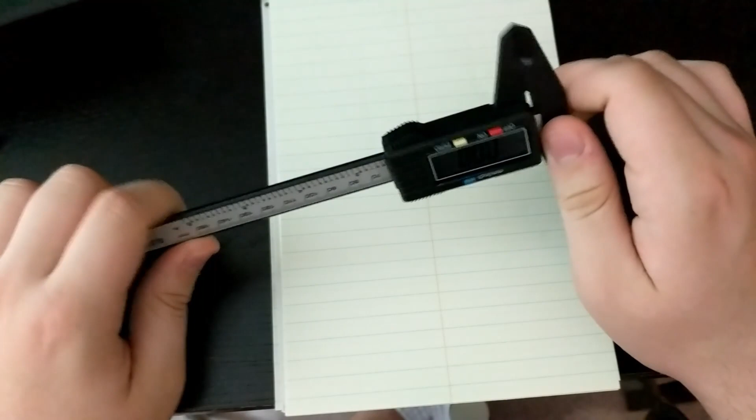I actually just recently picked up a caliper too. I recommend having a caliper if you're going to do this. It's not super important to have—you could easily use a ruler—but it's going to be really nice to have, especially in the future.

So what I like to do is start on paper, and I usually draw side views. I'm going to probably draw a view from this side and maybe a front view, because I'm not entirely sure how I'm going to shape that yet. I might not do that, but I might do it as I'm working on the model.

So what you're going to want to do, in my case, is I already measured the shower, and now I'm going to measure the speaker. So turn on your caliper—most of the time it'll turn on automatically. Make sure your caliper is zeroed, and make sure it's millimeters.

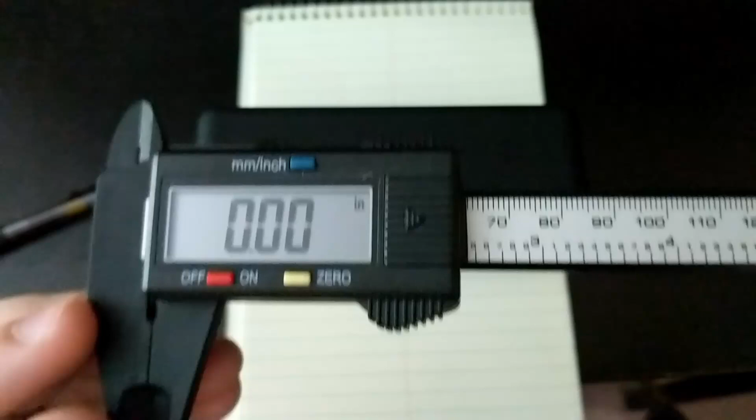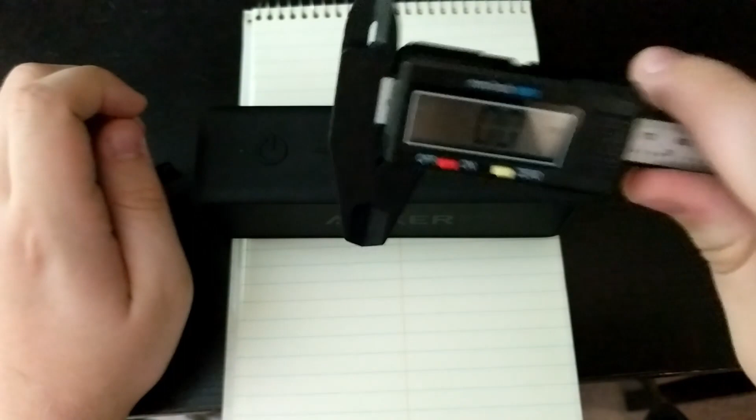Why would it be in inches there? So it's in millimeters—make sure you have it in millimeters. That's going to make your life a lot easier, especially if you have to convert from millimeters to centimeters or centimeters to meters. It'll make it a lot easier because the metric system makes sense. The imperial system does not.

So what you're going to want to do is open this up to slightly bigger than the thing you're going to be measuring, and then take a measurement.

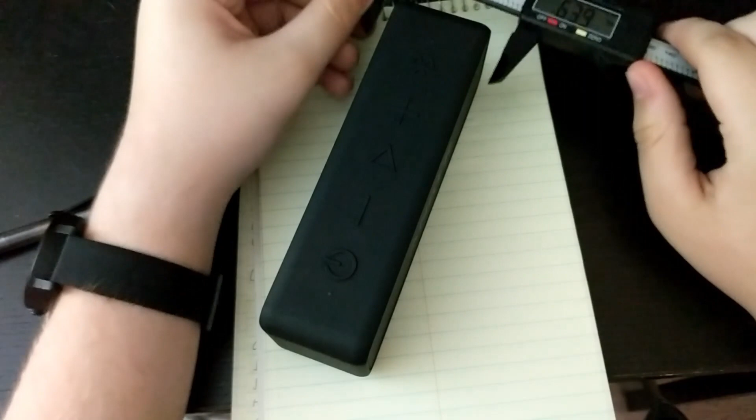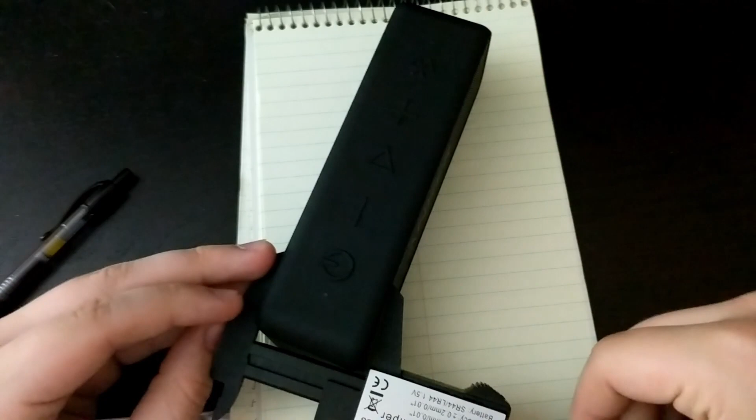So it says it's 46.8 here, wide, and I'm probably going to round it up to 47. And over here it is about 47, so I might do 47.5 just to leave a bit of tolerance for shrinkage of the model. I'm not super confident in that—about 47. It did move when I slid it off, so yeah.

And then let's see how long this will need to be. This might not be long enough. No, okay, so it's not long enough, but I'm honestly not too concerned about that, because I'm probably going to have it stick up in the middle here. There's like a bass reflector here, and I've covered that up before, and it doesn't affect the sound as much as if I cover up the speakers. So yeah, I'm going to do that.

So now that we've got our measurements here—47.5 wide, and the shower was 60 millimeters—I'm going to draw a basic sort of design here. It's not going to be super advanced. This would be a lot easier if I had graph paper, but I personally do not currently.

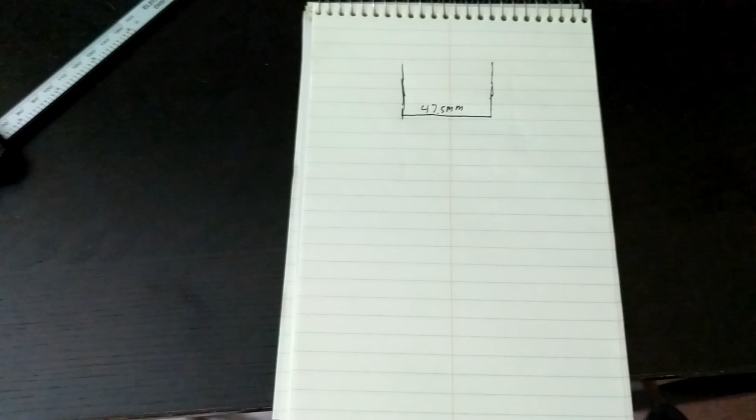I went a bit too far there. I'm going to draw a little line going across here, and this is going to be—how wide was it again? 47.5 millimeters. I've written millimeters just for this video. Normally I use millimeters as my default unit, or centimeters, but I will 90% of the time use millimeters, and yeah, for the sake of the video I've written that down.

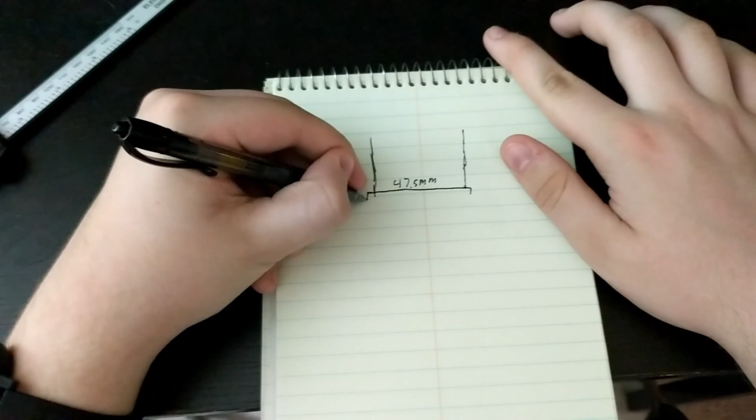And then for the bottom we're going to get a little wider. There we go. And then we're going to have it—actually, how tall is the speaker? Because we want it to go slightly higher than the speaker. So if you measure the height, same thing.

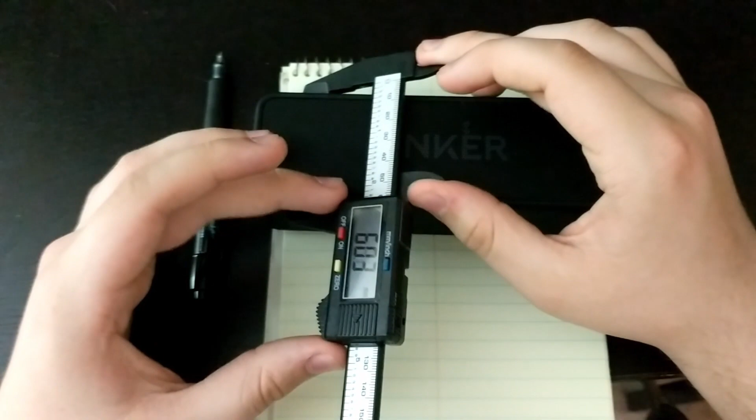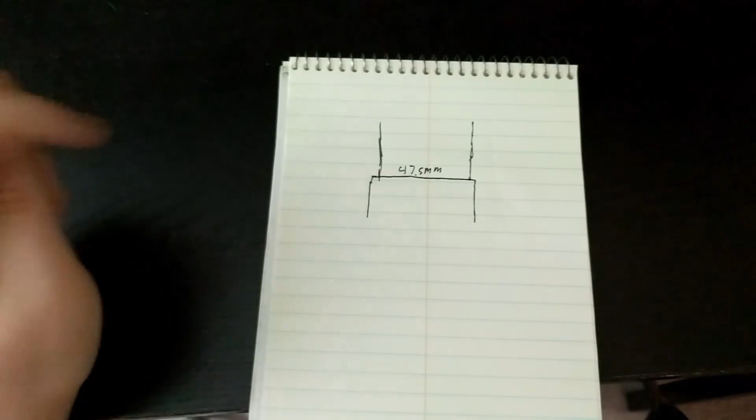Right, okay, height. That is 56.7, so I'll probably round up to 57.5 millimeters.

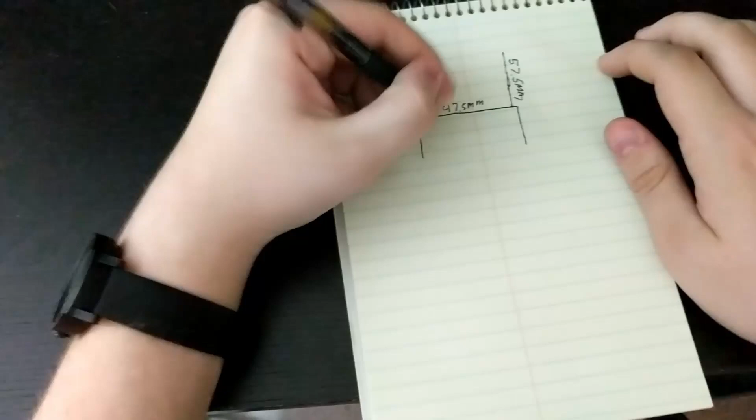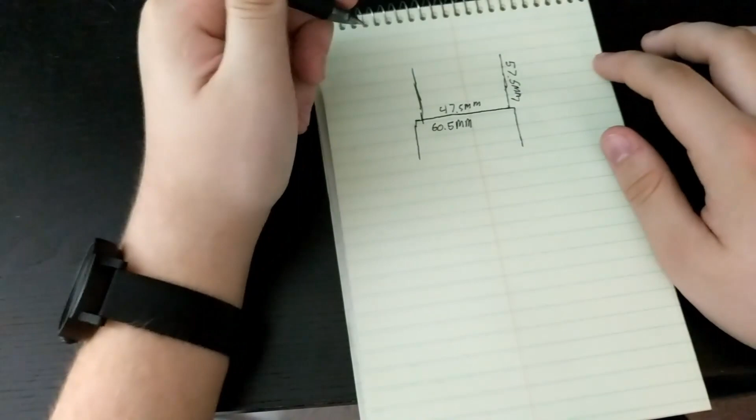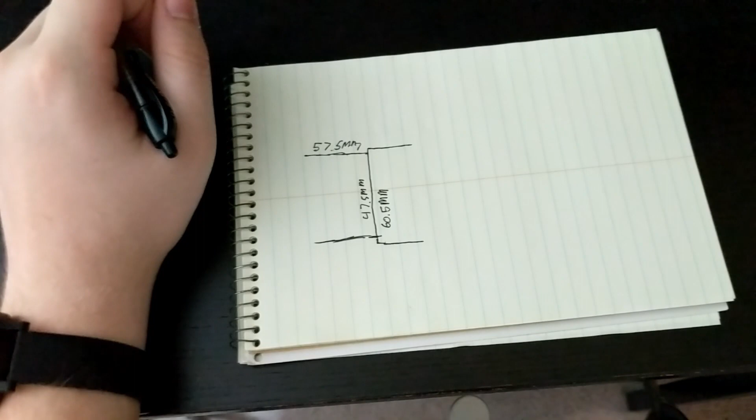And then down here we're going to want it to be 60.5 millimeters, because it was like 60.3. It's a weird width, but whatever. And then this is going to be, I don't know, it doesn't really matter the width of this, or the length of this part here, but let's make it 40 millimeters.

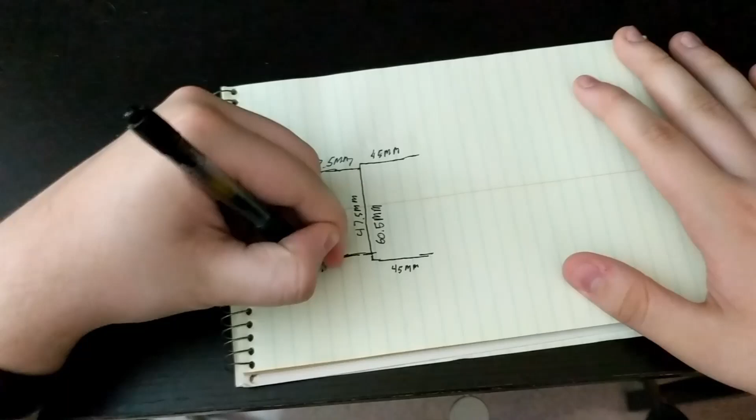No, sorry, 45 millimeters. I'll just write them over here too. Excuse my handwriting, I'm really bad. Oops, 45 millimeters. So that's the side view here.

And then what we're going to do is we're going to extrude it. Let's see, oops, hit my microphone.

I should probably be recording with that right now, but we're using my phone microphone. So I need a flashlight, do I have one of those? I do, interesting. I will 3D print this on Thursday or Friday, that's when my 3D printer is coming. Yeah, I don't have one yet.

Ooh, come on, there we go. So you can kind of see in there, so about the edge of the logo, so from edge to edge.

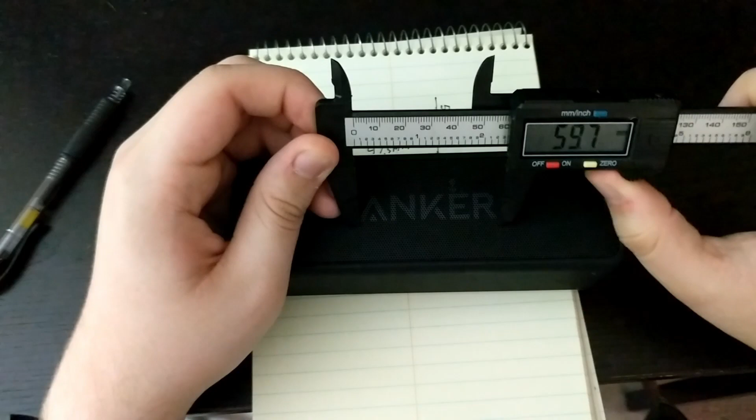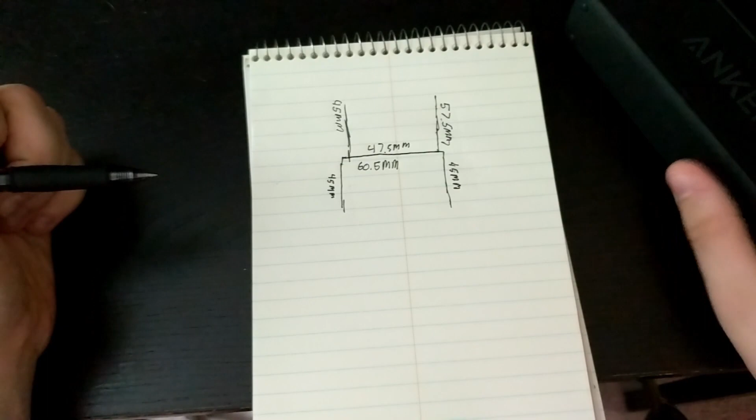Oops, so I'm gonna do the widest bits, because that's nearly exactly 60 millimeters. I'm not too concerned about the width of that, but yeah. Okay, yeah, then we're gonna extend it out 60 millimeters.

So let's start drawing a front view. Actually, that's 60 millimeters, and then we're gonna have this thing come down and be 1 centimeter wide, 10 millimeters.

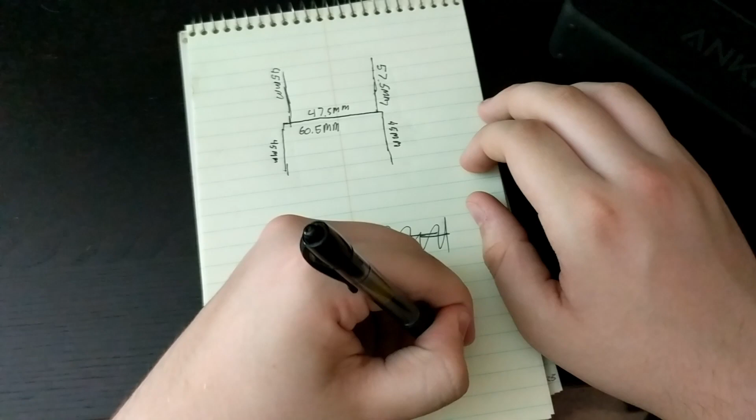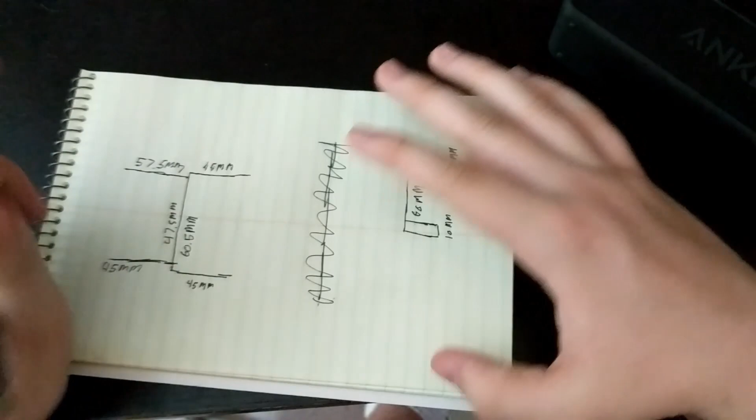Same over here, 10 millimeters. And then, as per this here, it is 45 millimeters, so we also want this to be 45 millimeters.

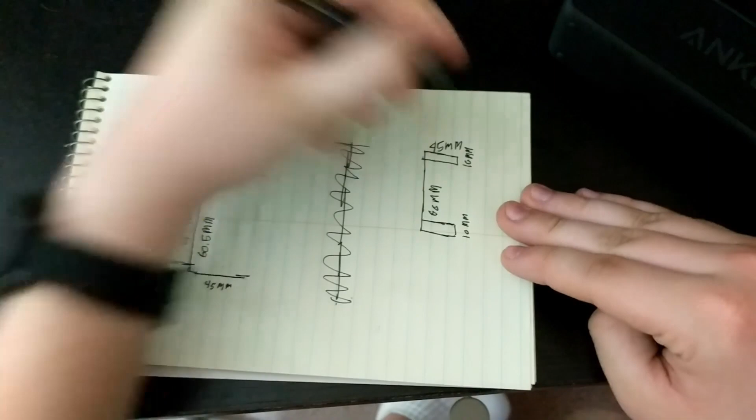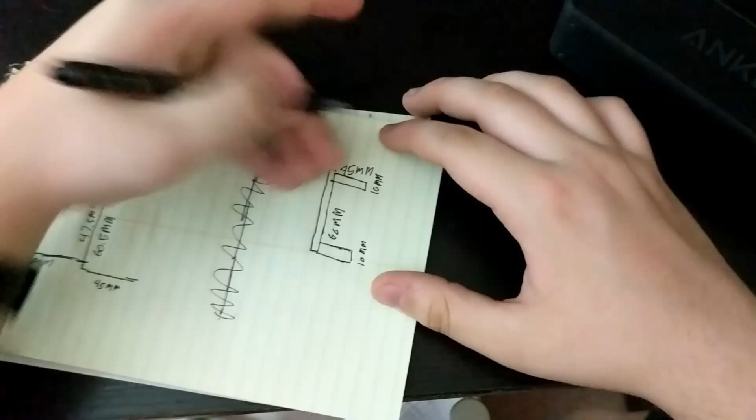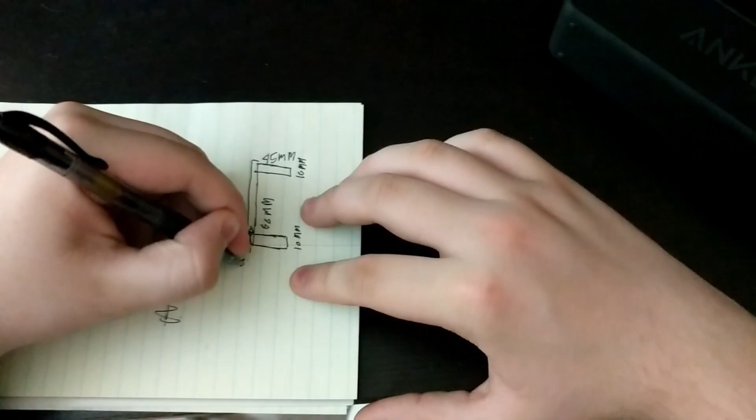And yeah, and then the top, let's make this center bit half a millimeter, or half a centimeter. Just kind of make it clear there. 5 millimeters, that's a really bad thing.

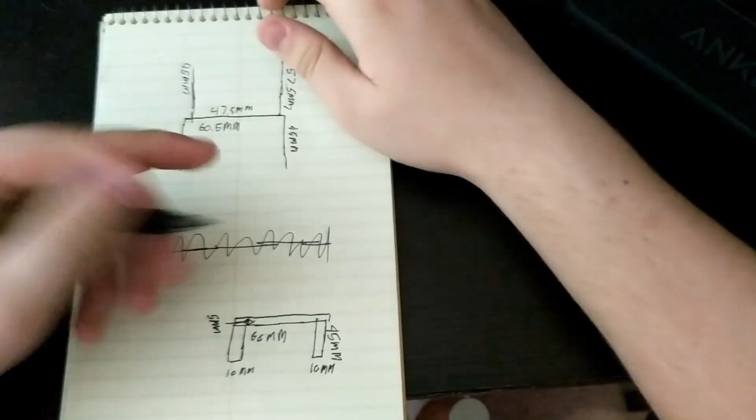Okay, and then up here we're gonna have it, okay, so let's put it about there, maybe. Yeah. This isn't gonna be dimensionally accurate.

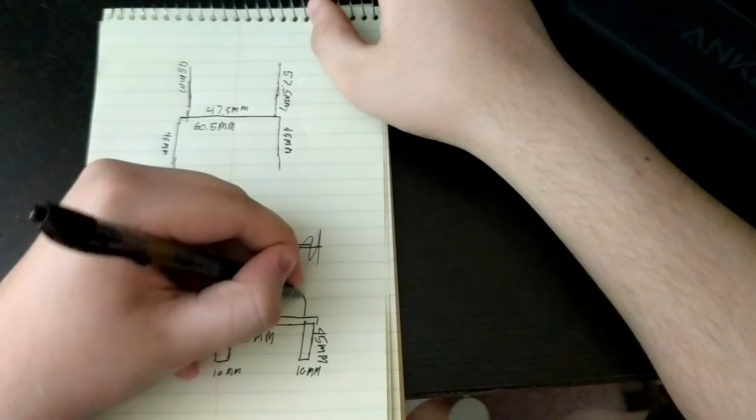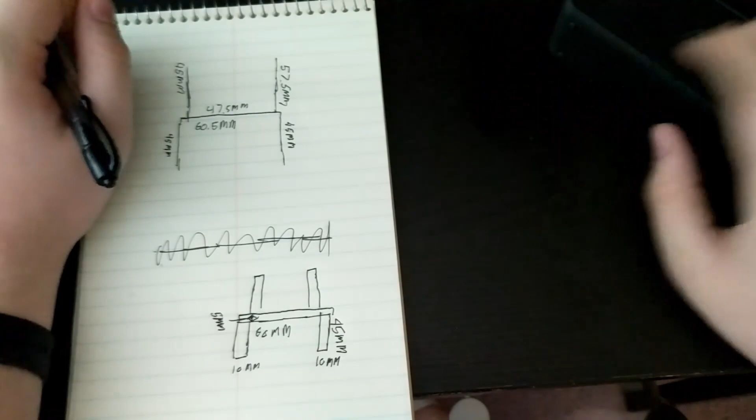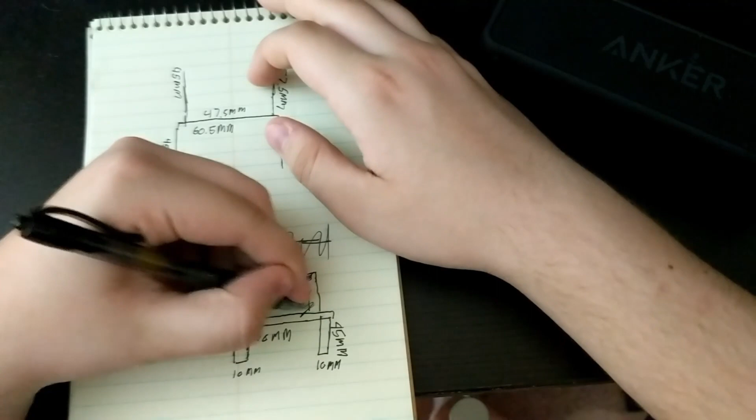So then you can see here that this is 47.5. Oh wait, 60. Oh, crap. Okay, just ignore that bit, ignore. 60, there.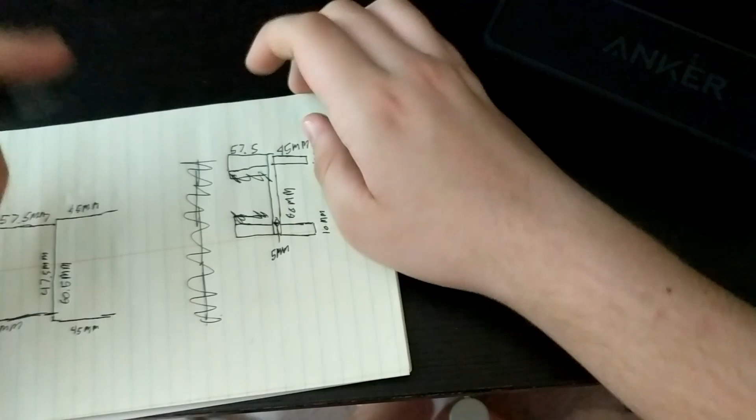So then that can be 57.5, and then those will also be 1 centimeter long. So it's not perfect, but it will get the job done.

So now let's head over to Onshape. Okay, so now that we're in Onshape, I have this tutorial series folder, but we're not going to use that because I'm actually using this for my own personal needs, but I'm just making it in a YouTube video. So I'm going to call this speaker holder.

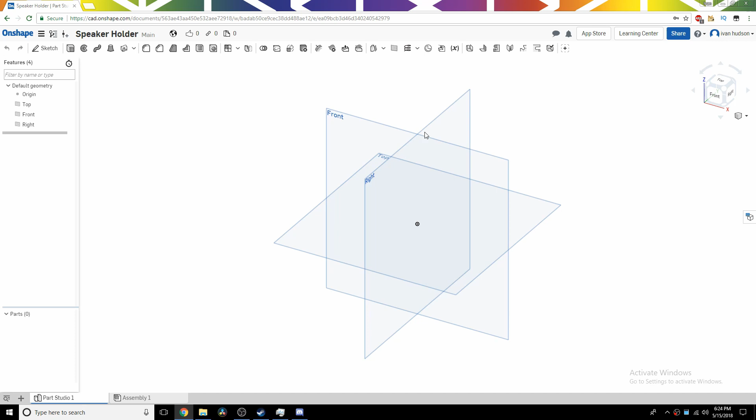And once we're opened up into the document, we're going to do a side view, I'm going to start with the right side. Okay, so you'll see here we've got this, and we're going to want to start a sketch, same thing as yesterday, it's not very complicated.

And now I'm going to reference my drawing. So I probably should have added a bit of width to the thing on there, but I'm probably just going to do that. I don't think this is actually set to units, I think this is set to centimeters. Yeah, millimeters. Let's do kilogram too while we're at it, oh grams, sorry, okay.

Let's make these 5 millimeters thick. So, oops, let's use the sketch. Okay, oops, Steam is telling me stuff that I don't really care about. Okay.

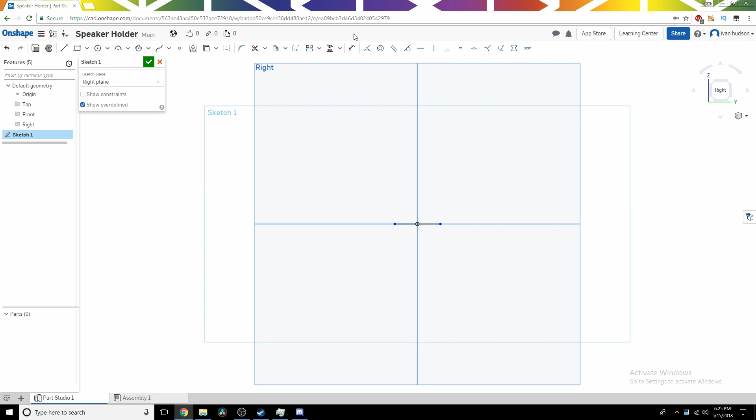We can actually center this. Also, I'm not sure if I did this yesterday, but it's really bad practice to have undefined lines. So what we're going to do, how wide does this need to be? It's widest, so 65 or 60.5. And what you can do in Onshape actually is 60.5 divided by 2, and what that'll do is that'll divide it by 2.

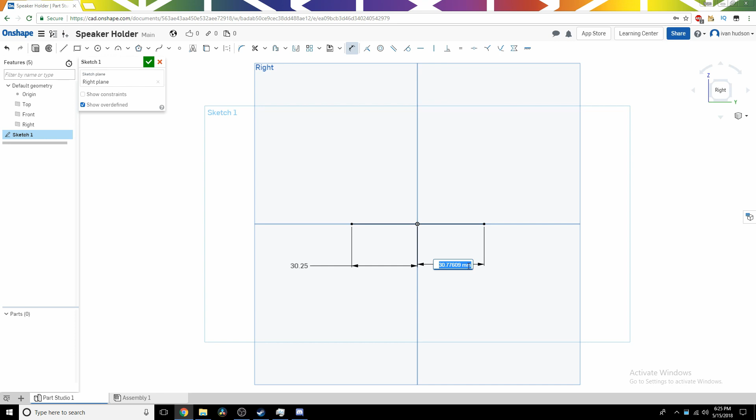And then on this side we are also going to make sure it's the same size, 30.25. So yeah, that's the widest point. And now what we're going to do is we're going to have this come down and be 5 millimeters.

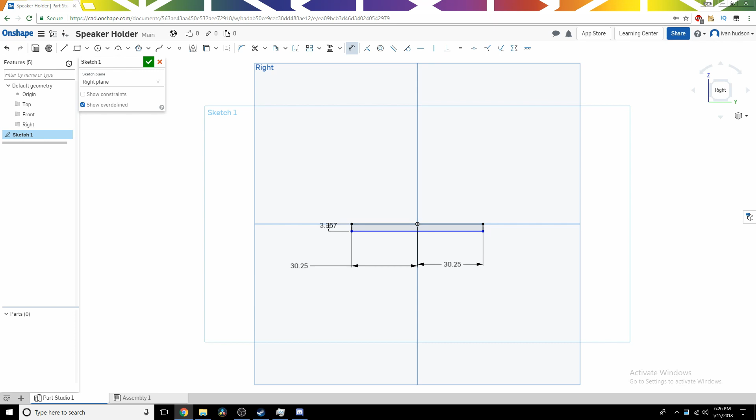Okay, so we want to make sure that all of these lines are defined, because it's just good practice to get into. So how much is 5 millimeters? Let me visualize this on my caliper. 5 millimeters is quite... it's actually not too bad.

Okay, let's do 4. There. Whoops. Oh, okay, it's not gonna like that because we, yeah, here. So, it's D, and then make sure that's still at 4. Okay, so that's all good.

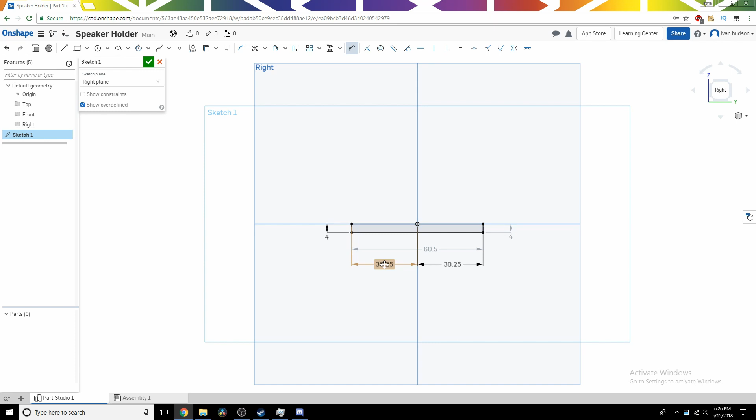Now this bottom line should be a total of 60.5. I just like having that there. Also, if you're doing this in college, I've heard that they will fail you for having undefined lines, so make sure all of your lines are black if you're using Onshape. But then again, I'm not in college, so yeah.

I actually might have to make this one here a bit longer. Okay, so that's good. And then down here we're going to make this. Okay, so how wide is that? So let's add 2 centimeters to each of these.

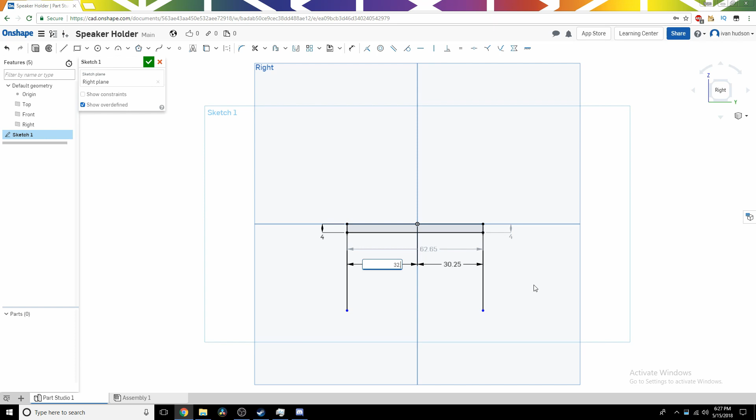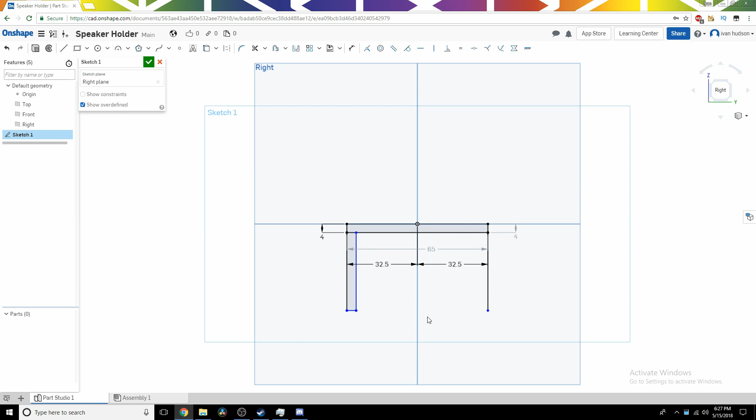32.5. Nope. 0.5, and then same thing over here, 32.5, because then that'll give us an equal width on each of these. Then we're just going to make these 2 centimeters, or 2 millimeters, sorry. I'm in the habit of saying centimeters for everything, so that's usually, sometimes, not always. I will on rare occasions.

Ooh, actually no, let's do 34. So we want these to be the same width, just because it'll look good. 34. Okay, so now you'll see those are blue, that means they're undefined. So we're gonna make these 4 width-wise, 4. And then from here to here needs to be 60.5.

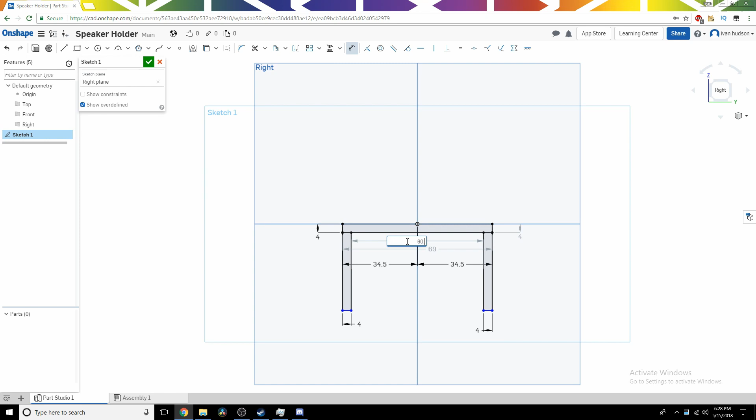Oops, what is it breaking? View. Ooh, actually this doesn't matter too much, it's fine-ish. That's defined, it should be defined. Why aren't you defining those lines? You're annoying me, damn it.

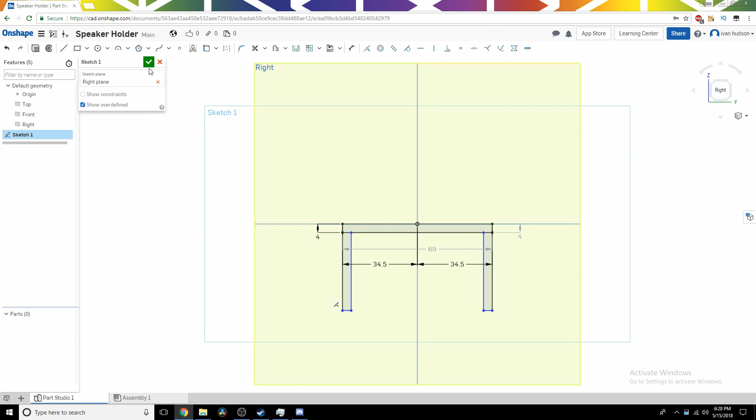Okay, you need to be defined. That's the one I'm trying. I know that's the one it's doing, but I like it being the black one. Fine, just be that way. Okay, whatever, that's bugging me that this one's going black and that one isn't.

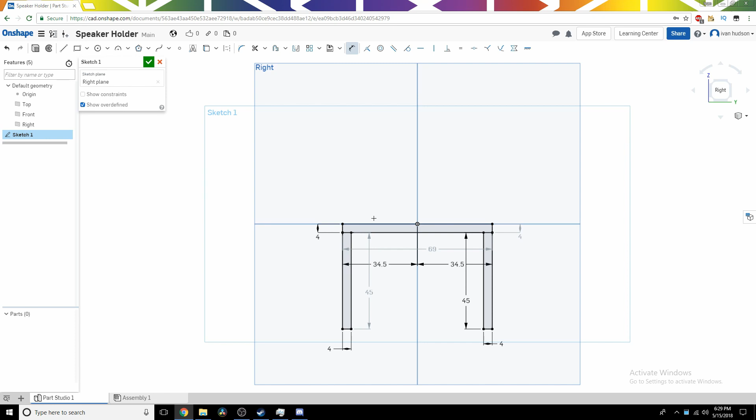This one needs to be 45 millimeters. 45. This one should also be 45. Good. And now up to here. So that needs to be at its center point.

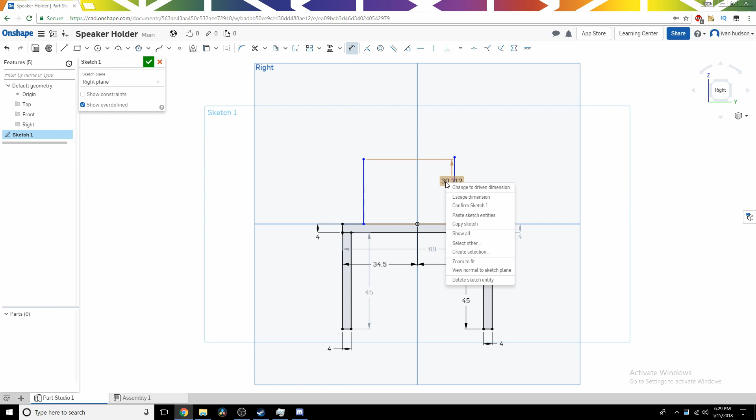Get another line. Okay, so, nope, we need the distance tool. These need to be, oops. No, I suppose we're gonna have to, let's keep that one. That needs to be, oh, I messed up on that. Whoops, 57.5.

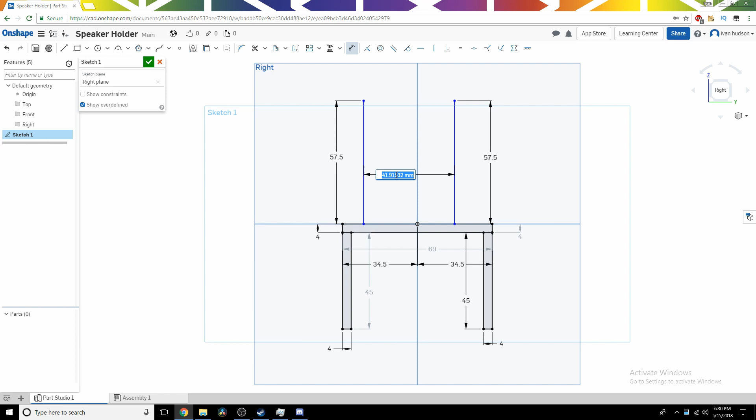Oh, 57, oops, good, 57.5. Where I messed up was I wrote 45 on this side of the drawing, whatever. And then here needs to be 47.5. Oops, 0.5. So now those should be good.

And along with this, we're going to make a line once again. Okay, so then these ones also need to be 4 millimeters by 4 millimeters. Perfect. And now we're just going to want to center these, so it's a total length of 69 millimeters.

So what we'll do is 69 divided by 2, that is 30, I don't know. Hey Google, what's 69 divided by 2? 30. The answer is 34.5. Okay, close enough, so 34.5. So on each side of these, they should be 34.5.

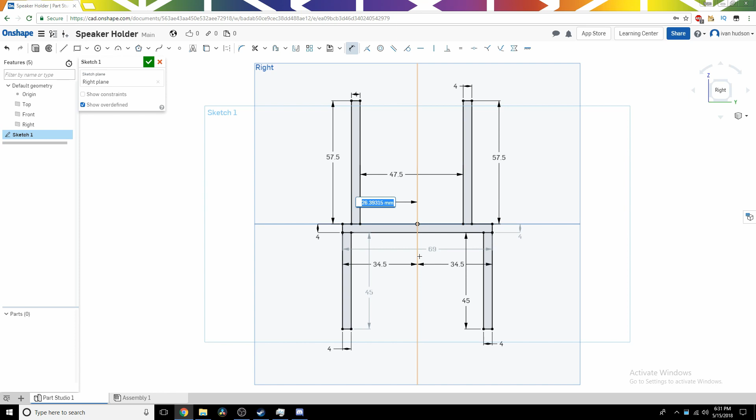Oh, okay, that's a rookie mistake. Okay. I probably should have thought that through a bit better on my drawing. Who cares? Yeah, okay, how are we gonna do this?

Actually, no, here, let's just fetch a calculator. Give me a minute. Go down. Okay, so let's do 69 minus 47.5. Oops, what is this thing's problem? I hope it was taking input. Oh, what the heck? Interesting, okay.

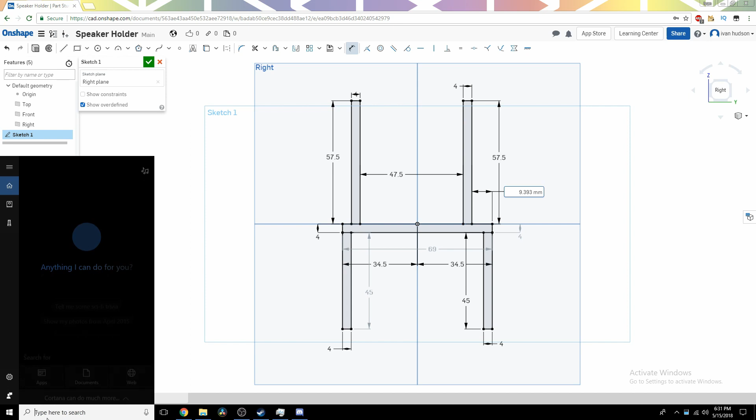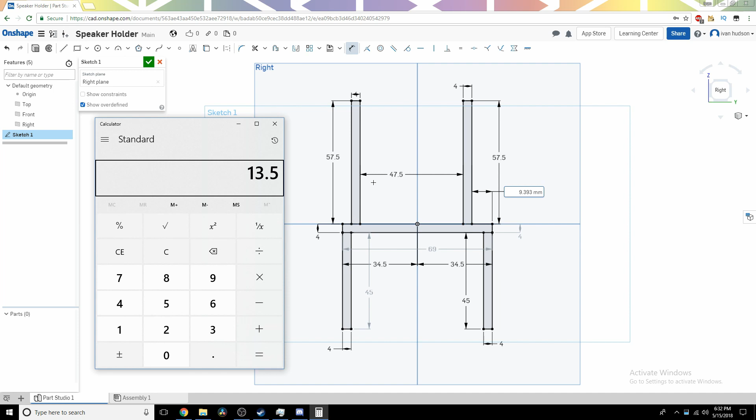69 divided by, or nope, not divided by, minus 47.5 minus 8 because of the width of these, so 13.5 should be the leftover space, right? Wait, yeah, so 13 and a half, divide that by 2, and you get 6.75. Then you do 6.75. Let's delete this one, I guess.

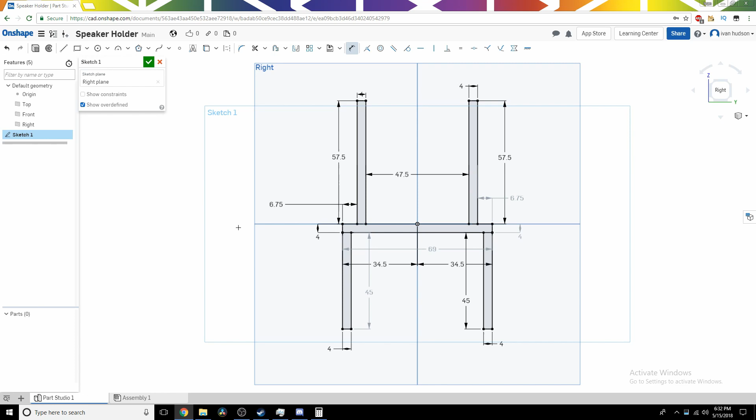And if we've done this right, it should be 6.75. Perfect! Okay, so now we've got the side view drawn, and you'll see it's still just a 2D drawing. And that's fine. So while we're at it, let's make sure none of them are overdefined, which is good. It's a good practice to get into. Yeah, so now we're going to extrude each of these. How far?

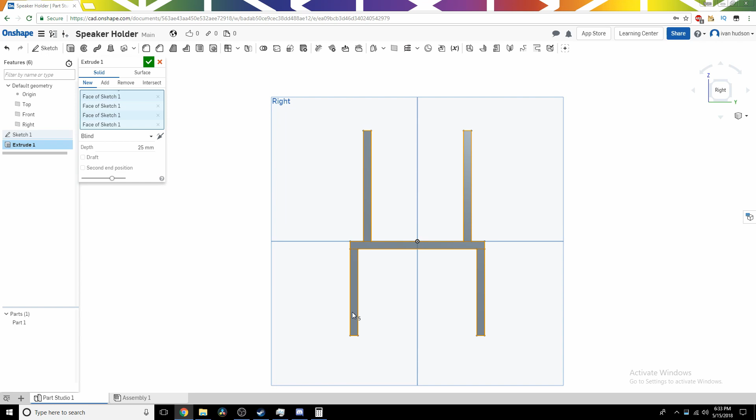And then we've got this. You might notice this is going to completely cover up the bass reflector. The way we're going to fix this is, okay, just double checking, we're going to create a sketch on that plane. And then what I am going to do is something a little like this.

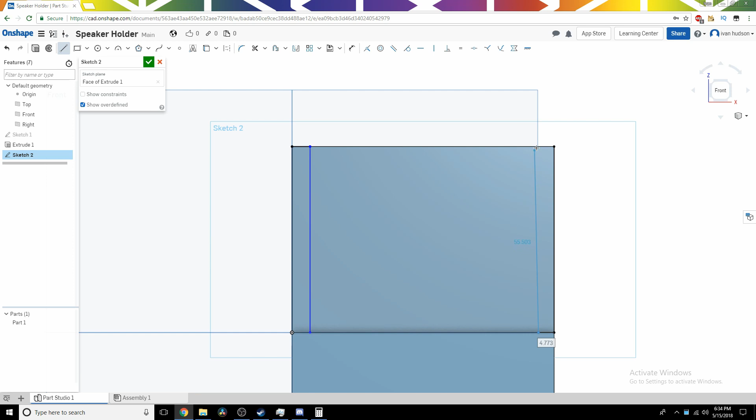Now I need to add a line on the bottom of this one. Perfect, that's very good. No it isn't. Oh yeah, it is. Okay.

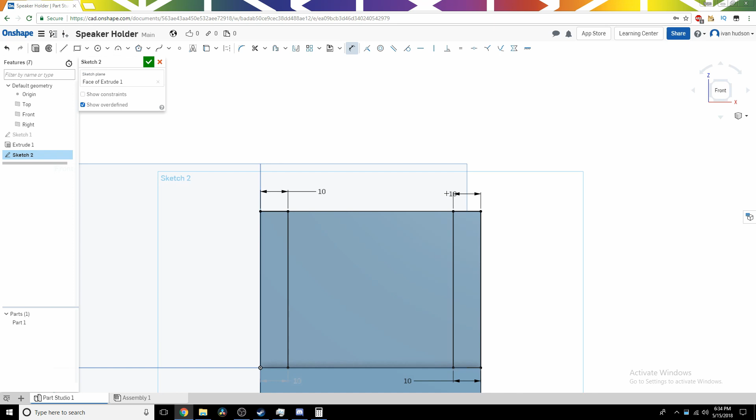Since I marked these down as being 1 centimeter, let's do that now. I'm just going to keep that there because I like knowing that. I know it's 10 centimeters, or 10 millimeters, but either way, I like having that reassurance.

That's all good. So what we need to do is we actually need to make this inner bit a closed-off shape, because that's how this works for whatever reason. Don't ask me why. Then we're going to choose the inner shape and make sure it's set to remove.

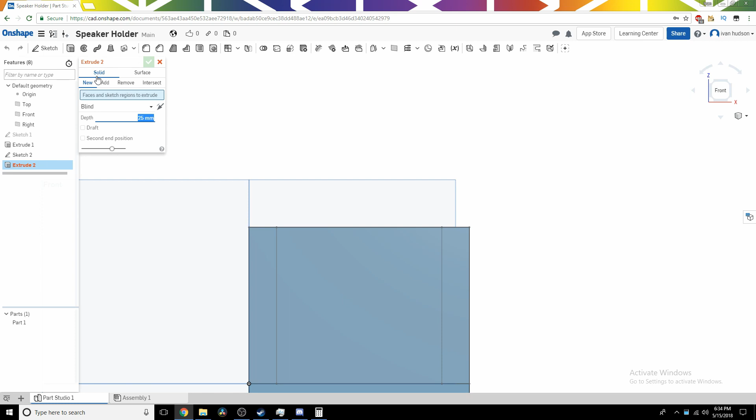And then, how wide is this? 69, right? Nope. Okay, whatever, it's good enough. So now you can see we've got the speaker holder.

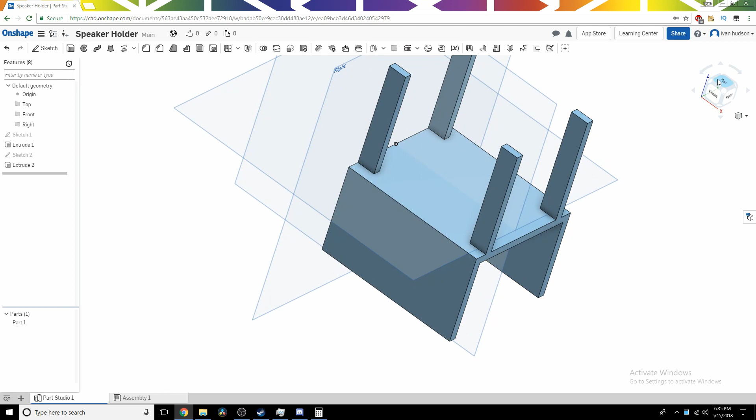What we could do on the bottom is we could actually make that a bit better, but we don't really need to, because it's already doing just fine the way it is. It will save plastic though, so let's actually do that anyway.

So let's go back into this. No, we're going to have to create another sketch. Okay, so we're going to have to create a sketch down here because I didn't think to make a plane. So we're just going to have to do this again. It's not going to be too hard.

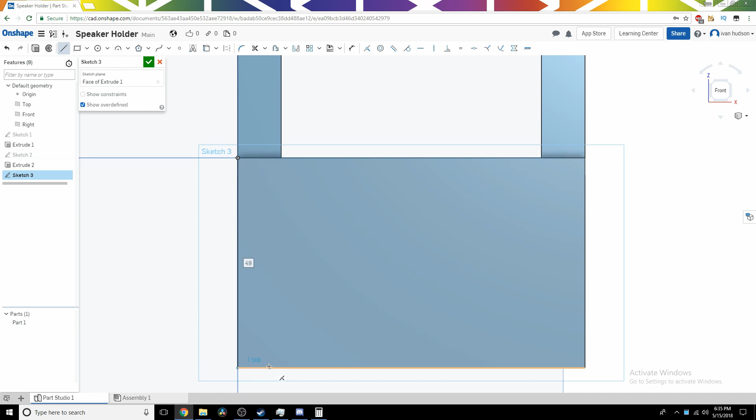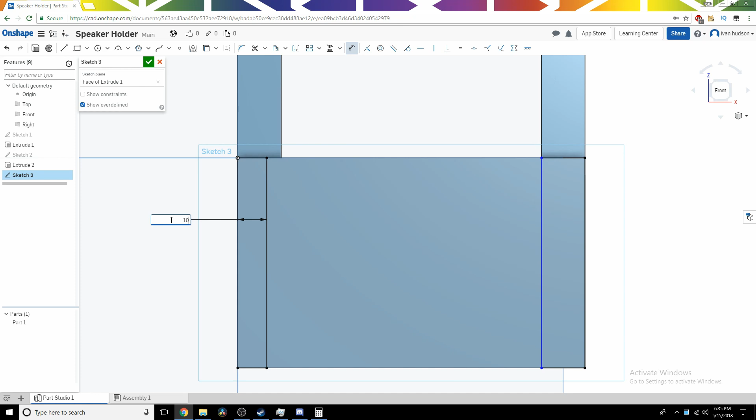Okay, then get the line tool once again. Oops, L, there we go. It doesn't have to be perfect, remember we're using the dimension tool. Then press D, pop open your dimension tool, make this 10, assuming you're in millimeters. In my case 10, because I highly doubt you have the same exact shower as me. Shower sliding door, I don't even know what it's called.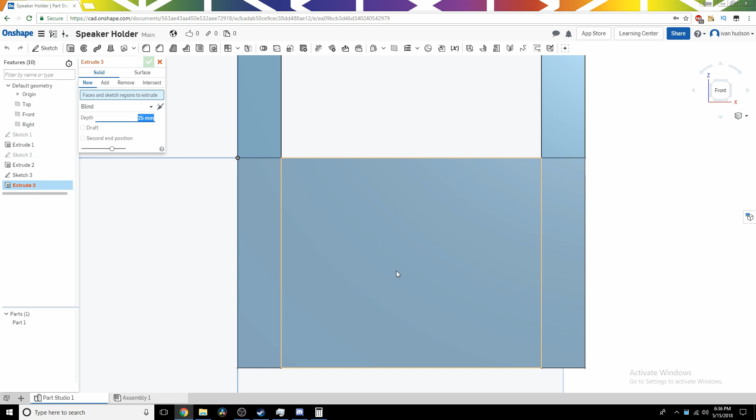Okay, perfect. And then, once again, we need to close this off. Perfect, perfect, and perfect. Okay, now this one should be the right amount to remove, so that should get us straight through. Perfect. Okay, so that's going to be very cheap, plastic-wise, and a problem.

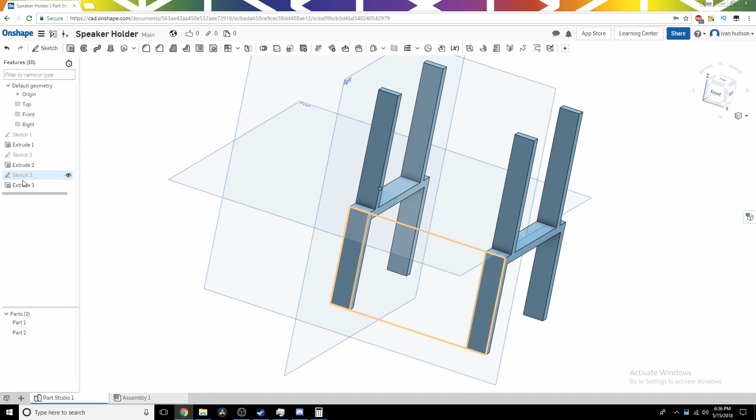Okay, oops, let's redo that. Yeah, okay, so we actually need this bit to stay in, so what we're going to have to do is make a line going, so we need to know how wide that is, basically, and 4 millimeters if I remember correctly.

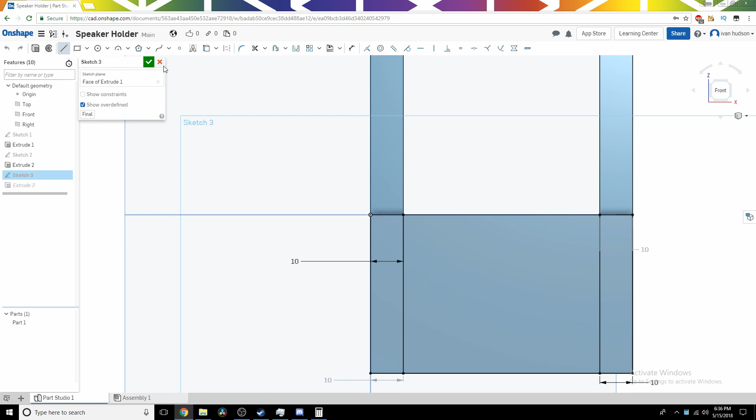So what we can do is we can go back to the sketch where we actually, wrong sketch, where we actually drew that, and we can see it is 4 millimeters. I was right.

So then we need to go back to this sketch and choose the front side, and then go like this, and then get a dimension tool. Oops, delete that, we don't need it. Okay, we don't need half of these, but either way, then we're going to make that 4 millimeters.

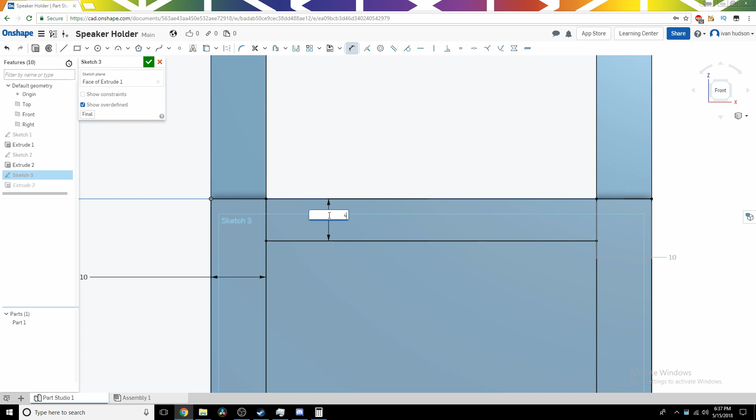So now, if we do that... nope, that's not right. Okay, there we go. Should have updated automatically, but it didn't. It's fine, so now that's good.

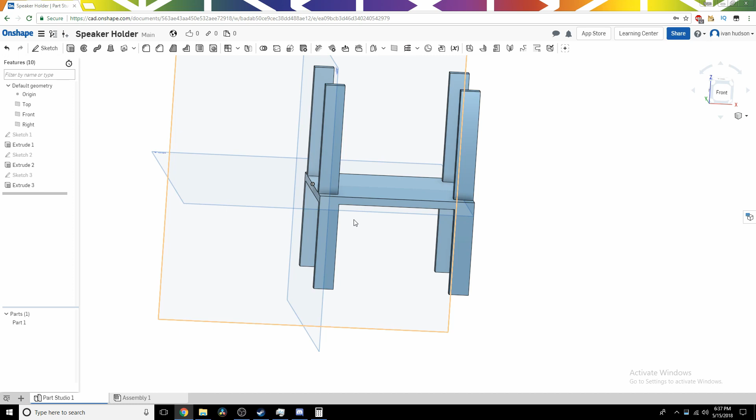And it's going to be an awkward print, but it's probably best printed on its side, so this side laying down. Because then it should only have to use support material on these parts here, which will be fine.